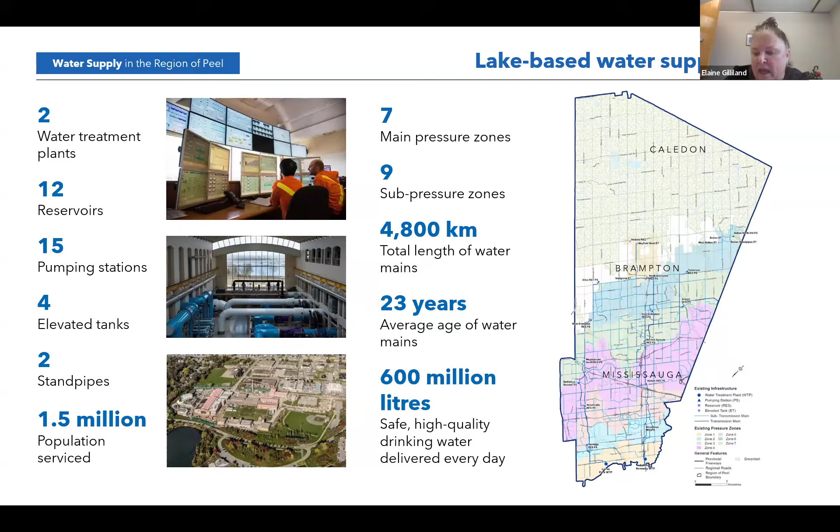For our water system, we draw water from most of Mississauga and Brampton and parts of Caledon, mainly up in Bolton—which you'll hear about, that's where we had a problem—from Lake Ontario. We've got 2 water treatment plants, 12 reservoirs, 15 pumping stations, 4 elevated tanks soon to be 3 since we're taking one down right now, 2 standpipes, 7 different pressure zones, and 9 subpressure zones. In total we're about 4,800 kilometers of water main, about 4,000 of that just in Mississauga and Brampton, while Caledon still has a lot of wells and some communal systems. Every day on average we use about 600 million liters of water.

On our wastewater system, we're a little smaller at 3,900 kilometers. To give you an idea of the scale, if you put our water system pipes back to back, that would get us from Toronto to Los Angeles. If we put our sewer pipes at 3,900 kilometers back to back, that essentially gets us from Toronto to Vancouver.

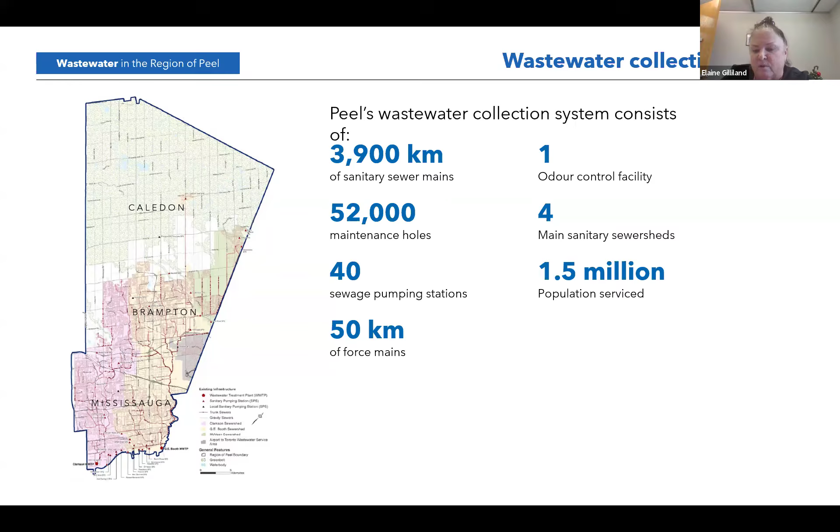We've got 52,000 manholes and 40 sewage pumping stations. We do take advantage of our elevation—the region of Peel is about 1,300 square kilometers, and our elevation in most places is obviously lowest at the lake, but we do have some elevation changes throughout, which is why we have the 40 different pumping stations. We have 50 kilometers of force mains and an odor control facility because we accept sewage from a municipality outside of Peel, and the buildup through those force mains creates a lot of odors. We also have 4 main sanitary sewer sheds.

Just to give you an idea who we are, we have a staff of about 300 people, and 180 of those are frontline operators who look after our infrastructure.

With our team, the way it's split up is we have our operation and maintenance team, which is all the water wastewater infrastructure, and that's Mike's main team where our operators sit. We have staff in environmental control that do the administration and enforcement of bylaws, as well as things like spill response. We have a business support team that does computer programming, contract administration, and has a condition assessment team. We also have a team that does business strategies and improvements because, much like a lot of operators, you're putting out fires probably 90% of the time, so we struggle with what to work on for improvement strategies. We have continual improvement programs and a team of 5 that support all of us.

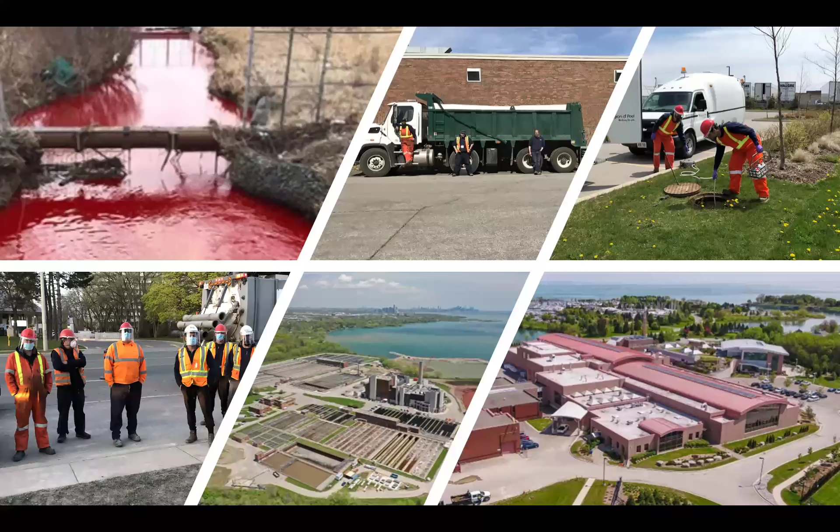In the upper right, one of the things our teams do is respond to spills. During COVID, nobody expected the pandemic and the deaths and everything else, and there was a spill of some red ink that turned a creek red for kilometers. It made CNN and some other large news outlets just because of the nature of it, and people made a number of biblical references about how rivers turned red in ancient times. We put that one in there because it's something we deal with on a regular basis.

We also have what we call our North Peel water and wastewater system. We have 6 smaller systems consisting of a number of community wells where Peel runs them and does the distribution of water, versus people having their own wells, because we're finding homes are getting built a lot closer together. We can't get lake-based water up there because it costs so much. So Peel has installed smaller systems because a lot of people have moved out of the city and don't understand well water, septic tanks, and everything it takes.

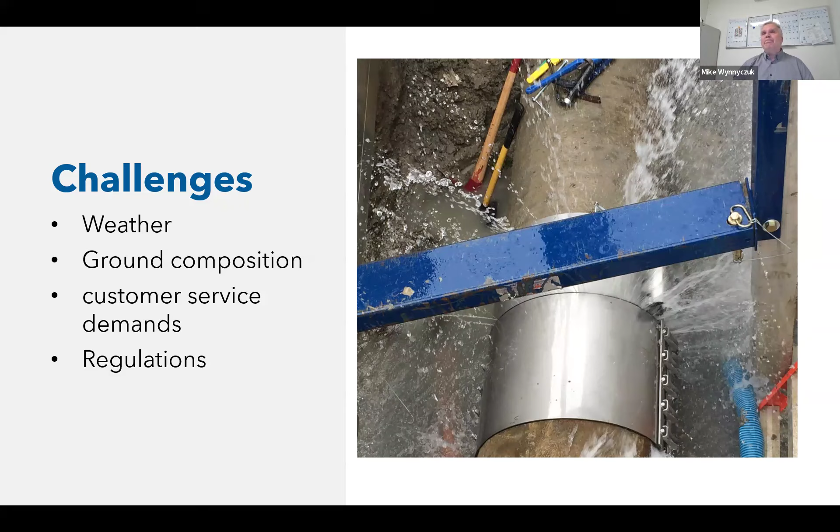I wanted to talk about a couple of recent challenges, starting with this one because I was more involved since it became very political. On a Saturday night, at an ice hockey arena, people at the facility reported that the water was cloudy and didn't taste proper. We sent staff out and they did sampling at our fire hydrants just outside the facility - everything was fine. In our system we can't cross into private property. This went on Saturday, we checked again on Sunday, didn't do anything to the system. On Monday morning we ended up having to model it, ended up isolating the facility, and we shut their water down.

We kept testing our water and had staff go out testing throughout the facility. They were getting hits of glycol, and a couple of other chemicals, and it was coming through both cold and hot water at the concession stand and in the showers, hadn't reached everywhere in the facility.

This was a city-run facility, so we worked with them and went through everything in their internal investigation. They brought in plumbers and everything else. What they had installed was, as a feel-good climate change project, a heat exchanger between their hot water tank and the main water supply for the facility that supplied bathrooms, concessions, and the filling line for the ice. One small broken pipe filled their whole system with glycol, antifreeze.

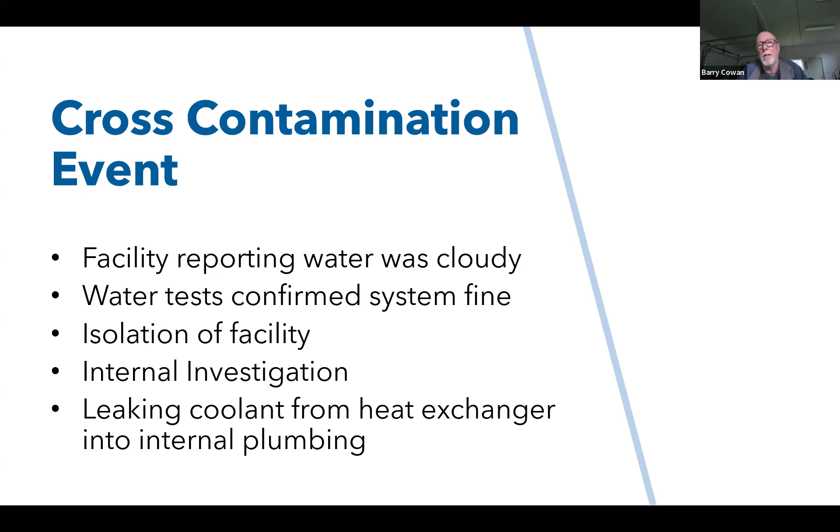So that's another one of our main ways of safeguarding our system. Even if we have a water truck that wants to take water out of a fire hydrant, there has to be a certified reduced pressure zone principle backflow preventer attached to the hydrant that we certify, and then we allow them to fill, and we charge them for whatever water they're using.

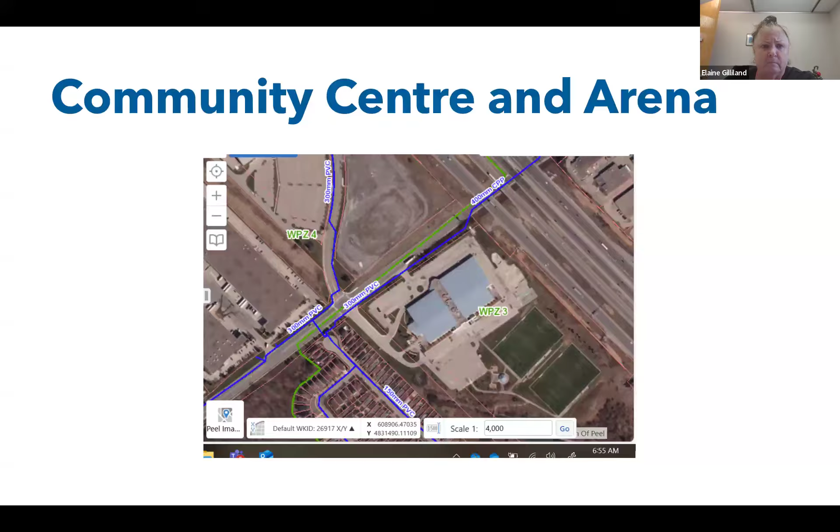So yeah, these were the actions: we isolated the facility, involved health department operations, flushing, and then the installation of a backflow device.

So this is one that has just happened. And Shane, are you on the line now? I am here, can you hear me? Okay yes, we can. Good, between Shane and Barry.

Yeah, I was there from the beginning, so I'll take this on. And I'll change the slides, Shane, since you've seen them, so I'll try to keep up with what you're speaking about. Yeah, this one came in.

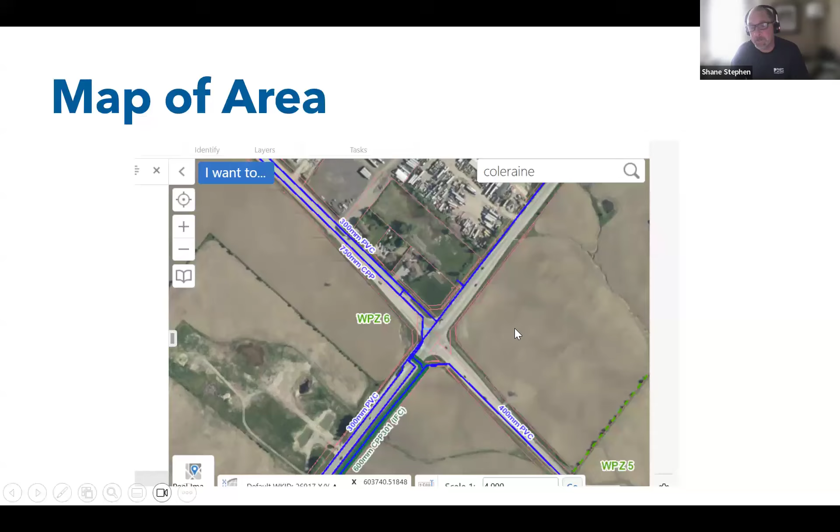And if you see, it's all farmland around there. But just northeast of that location is a small community of 27,000 people with lots of industrial, and that is their main feeder pipe going up to feed their wells and towers. Right beside it we had the 300 PVC, which also heads that direction, but it wasn't enough water to support that town's needs or that little village's needs.

So yeah, we got there Thursday night. We started planning right away. We had meetings, I think, every hour and a half.

Sorry Shane, and I'm not sure how many of you have maps like this, but maybe just walk through some of what the indicators are, and then as we go in, just to help out a little bit.

Sorry, thank you. This is actually two different zones. We have our areas broken up into zones, as Elaine mentioned earlier. So this area is a borderline for a lot of our zones. All the water mains to the south of where we are head into Brampton, and then everything north and east heads up towards the Bolton area.

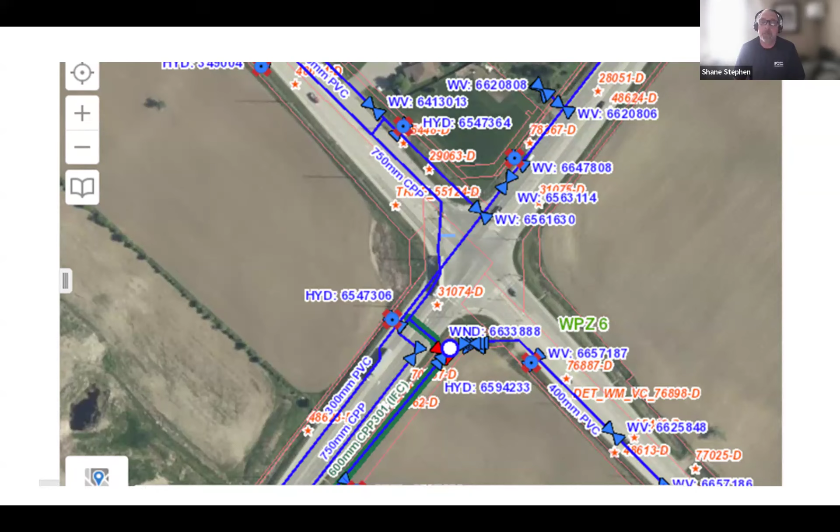And this map shows us where all our valves are, where all our interconnects are, where all our fire hydrants are, and it gives us a lot of very useful information, which we relied on a lot that night. That, along with the old drawings, helped us out a lot too.

Operations staff were on site when I got there. We weren't sure what to do yet. We knew it was a big water main, and we kind of had an idea what the problem was.

So Elaine started having meetings with all the engineering, modeling department, SCADA department, compliance, and communications, because we had a major road closed down at the time and it was heavy truck traffic road. So we had to communicate a lot just to help everybody get around the situation. That was all the planning part, and that was the biggest deal of it.

We had project managers online with us looking at drawings from years ago, and there was information we got from the drawings and the as-builts. We also have a flow modeling department, and they were on the meetings with us, doing different scenarios - what if we close this valve, close this valve?

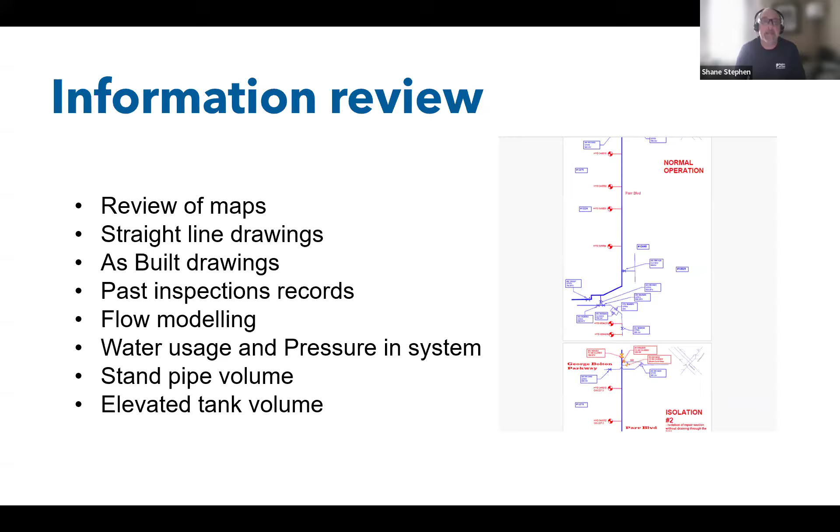Originally, we thought we had 24 hours before the little village of Bolton would be out of water. But as we started these meetings, I think it got knocked down to 14 hours. So we were kind of rushing, but we wanted to be prepared so we could just get it going.

So we had our contractor on site. He had a brand new piece of concrete pipe. I think he got there at like 3 o'clock in the morning, on site, ready to go. We have our welder that we used, and he had an oversized blind flange on site on the trailer, because we didn't know what to expect.

Because if we took the asphalt off, it's so thick, the water just would have been shooting everywhere, since we couldn't start digging this up until the water was shut off. So we had to be prepared - as soon as the water was off, we could just start going.

And then I think it was 11 o'clock in the morning, we shut the water off, and it took us a few hours to drain. That day we drained from the pipe, to give an example, 625,000 liters of water - it was 1.2 kilometers of 750 millimeter pipe.

We were at the bottom of the hill, so everything was flowing down to us, which did help us out in the long run. We had everything on site, including PVC pipe in case we had to do a temporary bypass. Everything was on site, and then it was like, okay, let's shut the water off now.

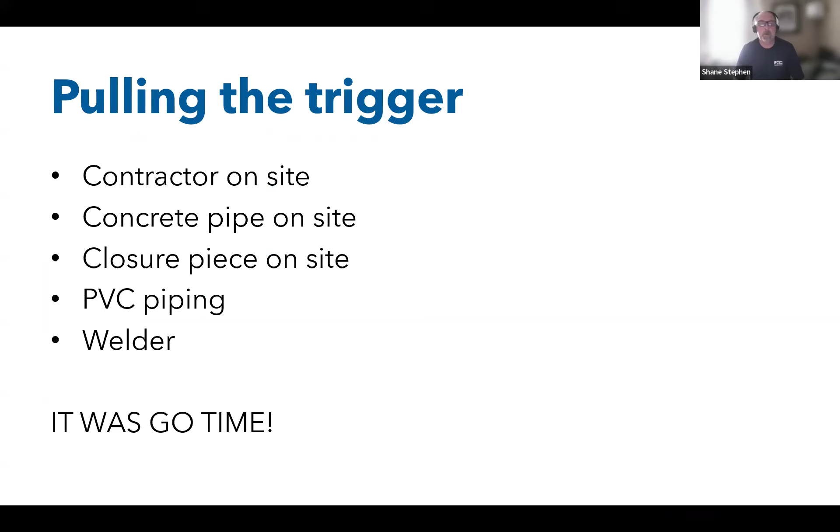And we had a really good shutdown. And we dug and dug and dug and dug - it was a deep hole, a big hole. And then we found an old flange that was leaking on one side.

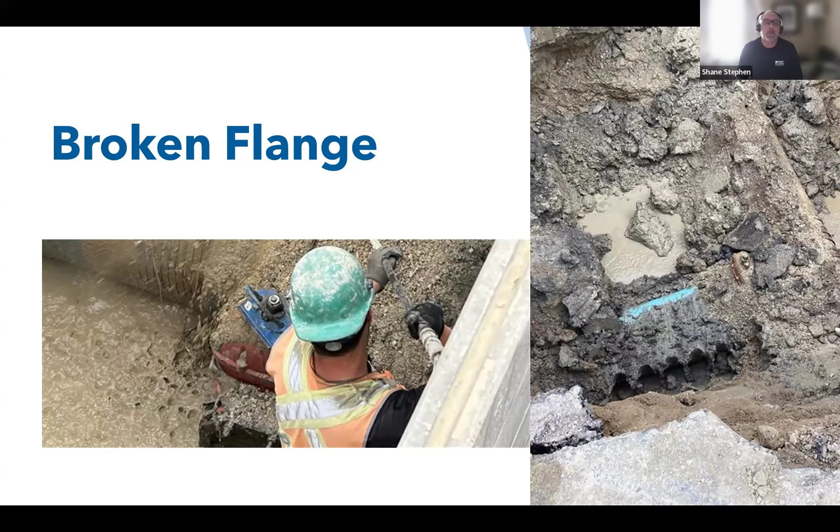Once we got it drained, the welder went down. They pulled the old flange off. He was able to take measurements, and the flange that was leaking was a 24-inch wide flange. The one he had brought with him was 36-inch, so we knew it was going to cover up that area that got affected.

The town's about 36,000 people. So at night, on the Thursday night when this started happening, we were working with our communications team for the road closure, but we also put in a mandatory water restriction - nobody could do outdoor watering, and we tried to limit indoor water use.

So we had our environmental control team go to all the high water users and say no indoor water use today, none of this, none of that. And it cut our percent water usage from about 10% down to about 3% per hour. So that's what gave us a little bit of extra time.

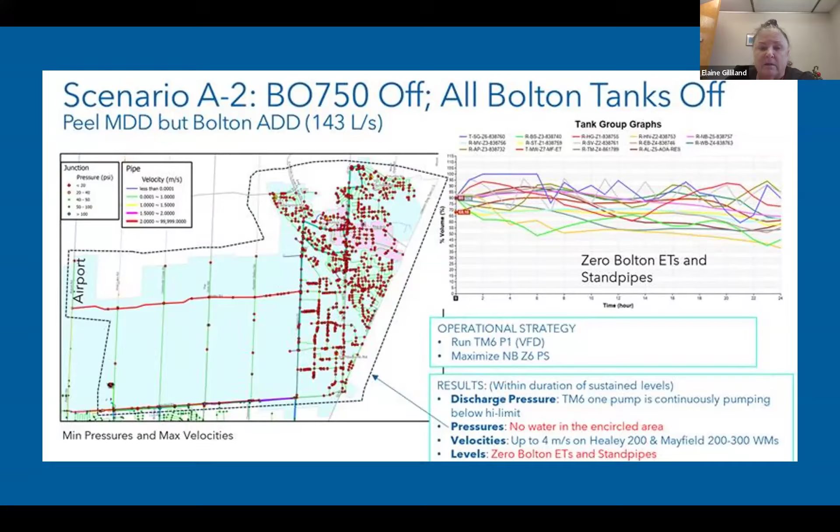So we were getting to a point where we would have had everybody out of water, and then once the repair was done, we started filling the tanks again.

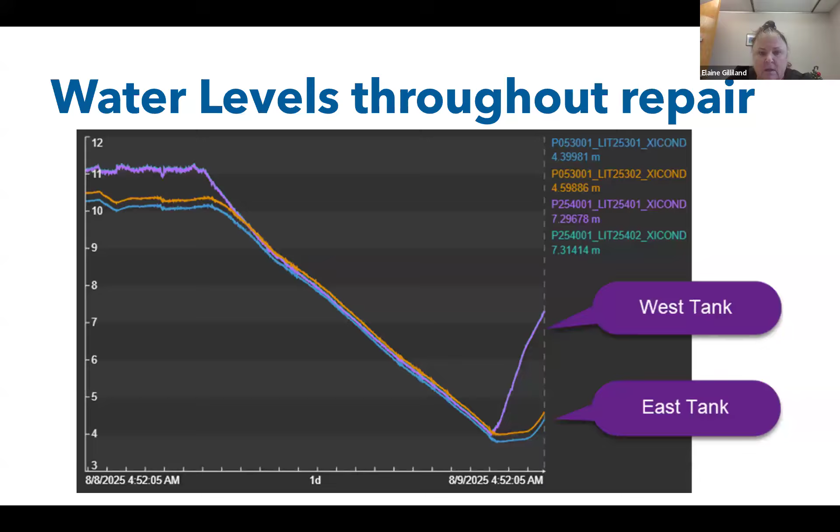But it really took a village getting the shop drawings, the shutdown plan, walking through all the scenarios. Then 11 a.m. was there, work throughout the day, and then at 3:30 in the morning is when we were able to restart filling again.

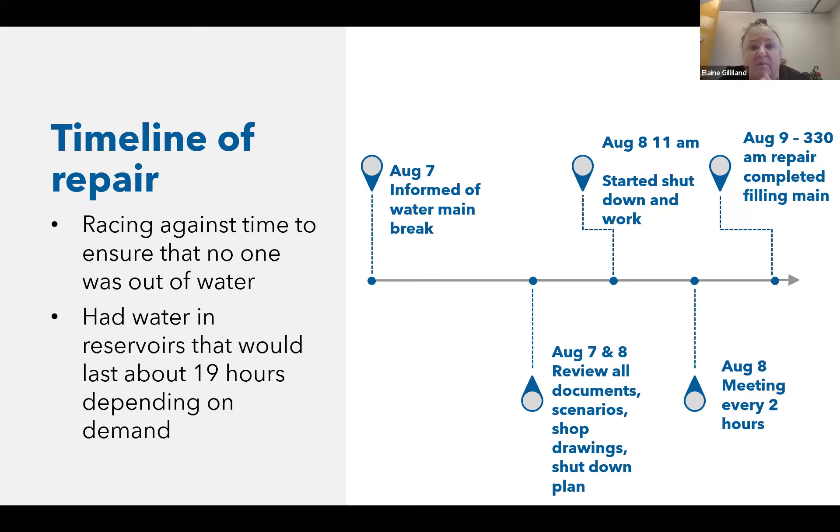So with all of that, those are kind of our larger scenarios. But one challenge we have in the province of Ontario is we have about 1,200 to 1,500 licensed operators. To operate in Ontario, you have to possess certificates or licenses from the Ministry of the Environment, Conservation and Parks. We start people off as an operator in training, get their experience, and then they work up in the licensing. So Barry and his team are our training and technical support team.

Maybe Barry, I know our next one talks about our website, but if you want to talk about some of the recruitment, then I can open up the website as well.

Just one observation: the certification that we go through in Canada is exactly the same one that CAWASA operates in the Caribbean. Perfect. So everybody's aware of ours, that's great knowledge to know. Thanks, Valerie.

Excellent, yeah, so we're actually on a recruitment drive right now. We've just hired 12 people that we're going to be starting out in the middle of October. Super excited about that. Some of them have years of experience, and others are brand new coming into the industry.

Our interview questions themselves are really more of a technical nature. What we found before was that, because it's an outdoor four-season job, you're going to be working with a Humidex reading of 44 degrees Celsius, or you might be working in minus 35 degrees Celsius.